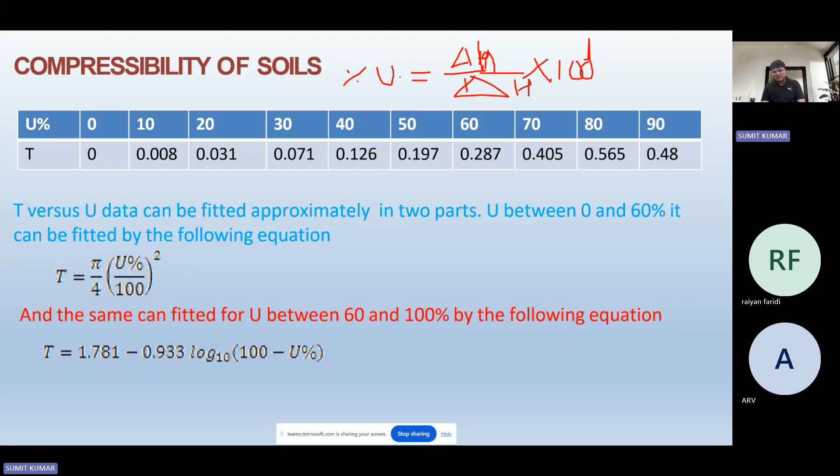But again, some things you need to remember: what is the value of T when percentage U is 60%, because you need not calculate every time whether the percentage is greater than 60% or less than 60%. So T value is 0.287 when you calculate pi by 4 into percentage U of 60, that is 60 upon 100 squared. So you get the value as 0.287. In this manner you have calculated the value of T.

Subsequently, when the percentage U value is greater than 60, you use the correlation mentioned below, and you could calculate the value of T for those cases. I will suggest that once the lecture is over, you try this by yourself using calculators, and you will get the correct picture of what we are discussing.

Now, when we are talking about the compressibility, it is mentioned that if the soil above and below the consolidating layer are pervious, the water under pressure in the layer will travel either upward or downward. This case is known as two-way drainage, and the length of drainage path, that is the maximum length the water particle needs to travel for dissipating pore pressure from the consolidation layer, equals thickness of layer upon 2.

Suppose over here you can see the figure, three layers are there, in which the second layer, suppose this layer is clay, is present between two layers, in which the upper layer is pervious, meaning permeable, and the lower one is impermeable. So if it's a pervious layer, it might be sand, but if it's an impermeable layer, it is clay or silt.

So over here, when the load is applied in the downward direction, the settlement takes place due to expulsion of pore water pressure, or the void present gets removed. But we have read in consolidation as well that... give a minute.

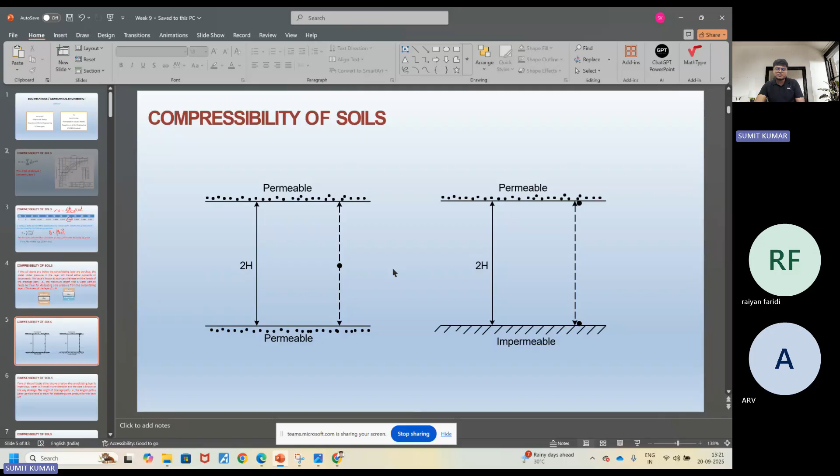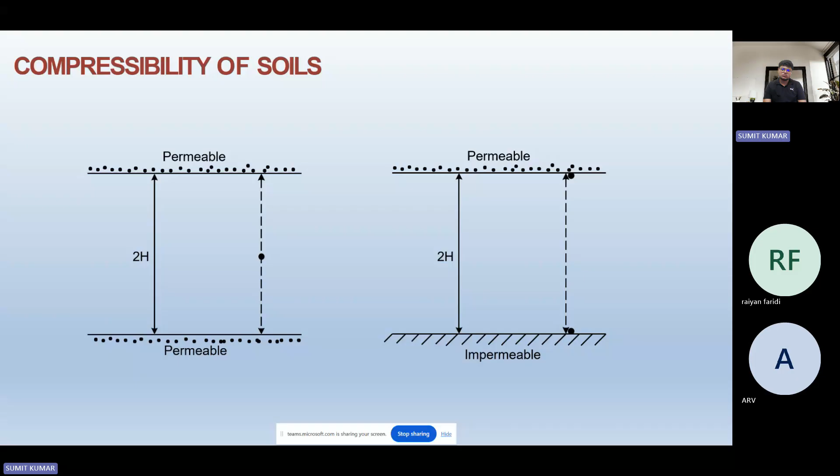Now, oh sorry, I don't need to draw that, it is already in the next slide. Over here you see that in the first case, the permeable layer is present in the upward as well as downward direction. Hence, when the load is applied, the expulsion of water present in the clay layer takes place in both directions. Hence, the 2h becomes h, and in the same way, in the second layer, if the impermeable layer is present in one direction, it remains h only, not h by 2, or in that case 2h, or in that case h, right.

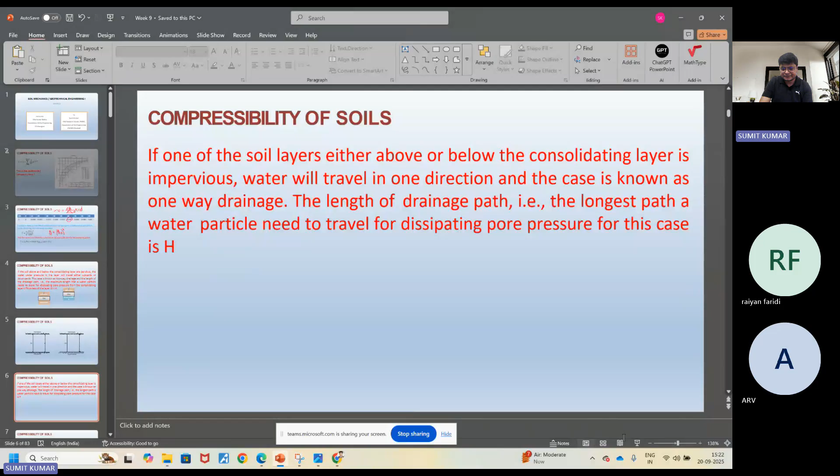Now you see over here, if one of the soil layers either above or below the consolidating layer is impervious, water will travel in one direction, and this case is known as one-way drainage, while the length of drainage path remains the same, that is the longest path as the water particle needs to travel for dissipating pore water pressure.

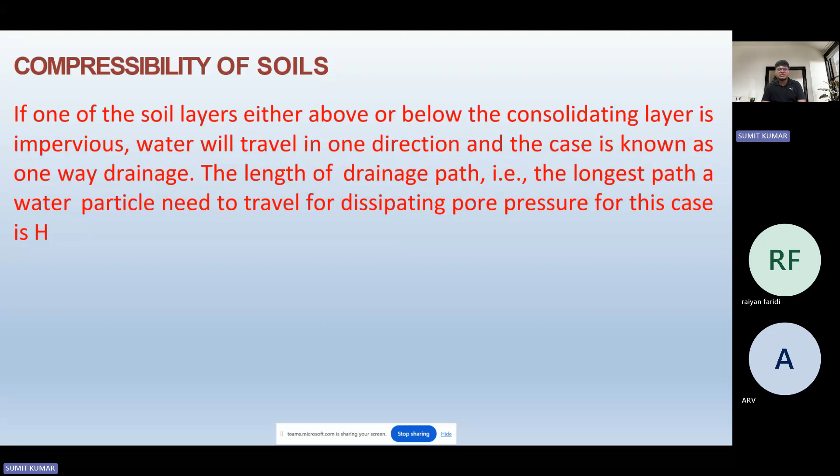But in the other way, if the pervious layer, permeable layer, is present both in the upward and downward direction, in that case the water dissipation takes place from both directions. However, if for a particular pressure increment applied during the consolidation test, the compression of the test sample is plotted against the square root of time, the results shown in figure in the next slide.

But what I want to show, one more important thing is, before going ahead, I want to mention that if you have observed, for the sand layer, settlement takes place in a very small interval of time. Whatever settlement is going to take place happens in a very small time interval and is already achieved. Suppose you are constructing some multi-story building, and over there the soil is sand type soil.

So the settlement at those locations takes place during the construction of that building only. But why? If over there clay soil is present, that settlement takes place over years, not even in 2 years, 5 years, 10 years. Maybe it takes 50 years, 100 years, or many more, because in clay small pores are there, and that settles over the period of time.

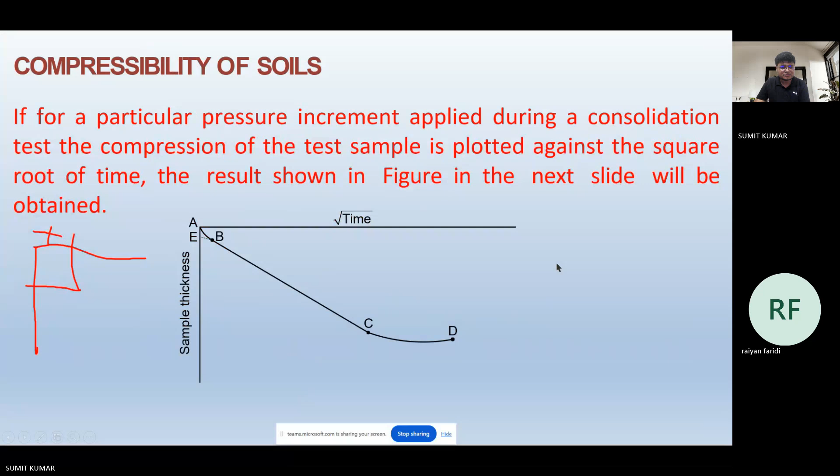So we are talking about the compressibility of soil. The curve is seen to consist of three distinct parts: AB, BC, and CD. The AB, if you look at this graph, we are discussing about this only, in which root time versus the sample thickness has been plotted. In this, if you have seen the AB point, which is the initial section, AB, then BC, and then CD.

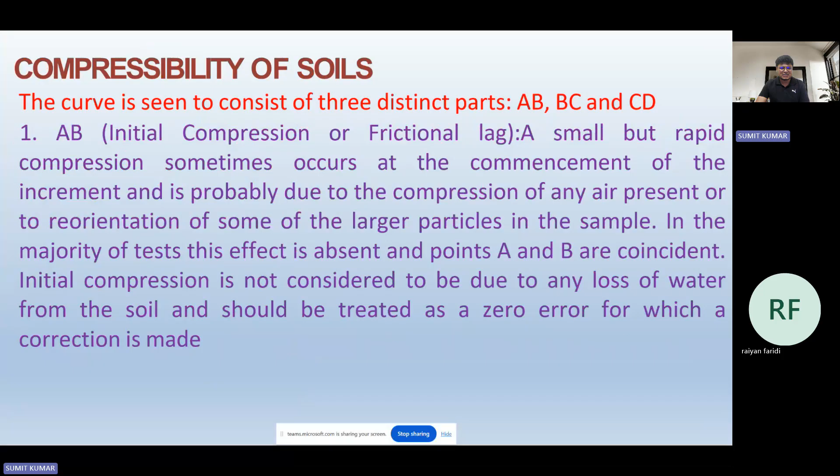So initial compression, or the frictional lag, a small but rapid compression sometimes occurs at the commencement of the increment, and is probably due to the compression of any air present or the reorientation of some of the larger particles in the sample. In the majority of tests, this effect is absent and points A and B are coincident. Okay, so I am not very keen to discuss these things. I will move to questions later. If we need it, we will discuss this.

The basic thing you have already understood. We move to problems. Once the problems are done, we come over there.

Starting with the first problem, in which it is asked about Terzaghi's one-dimensional consolidation theory: assuming E versus P relationship linear, or E versus log P relationship linear, or E versus log P by P naught relationship linear. We haven't discussed this today, but if you have attended those lectures taught by sir, you could be able to answer.

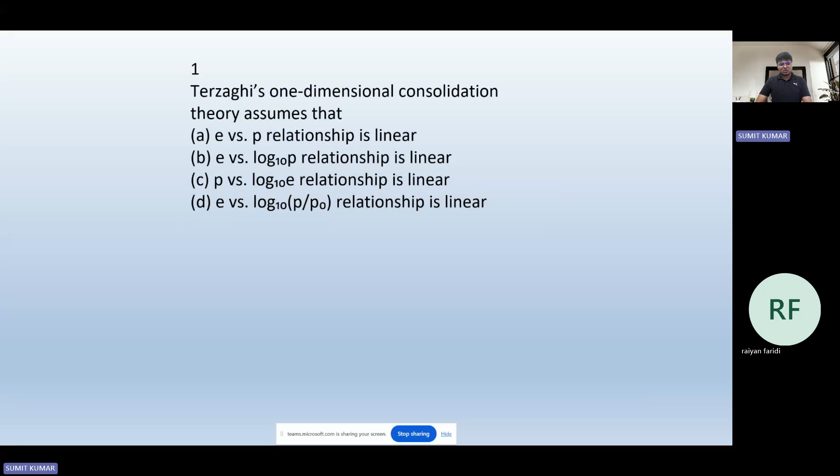Option A, that is E versus P relationship of Terzaghi's one-dimensional consolidation theory, because it assumes coefficient of compressibility as constant, hence E versus P relationship is linear.

Now the second question says the coefficient of consolidation is used for: establishing the duration of primary consolidation; estimating the amount of settlement for the load increment; determining the depth to which the soil is stressed when the load is applied on the surface of the soil deposit; or determining the pre-consolidation pressure of the soil deposit known to be over-consolidated.

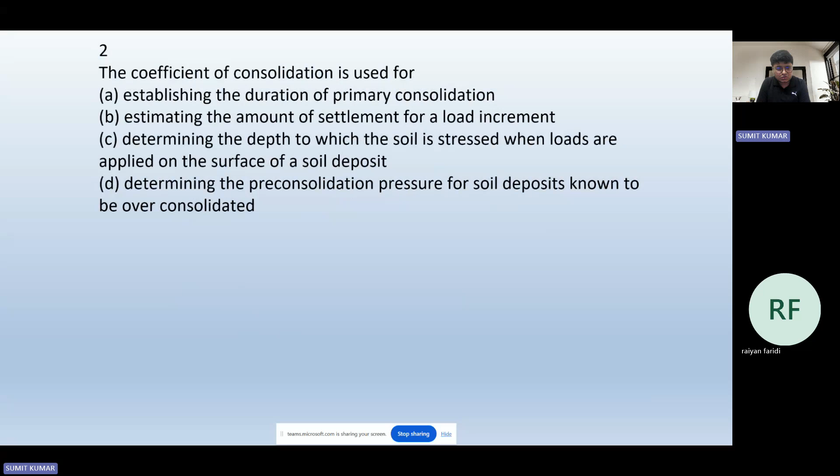If you have read this, the option... TV equal to CV into T by H square. If you remember, we have shown you this correlation.

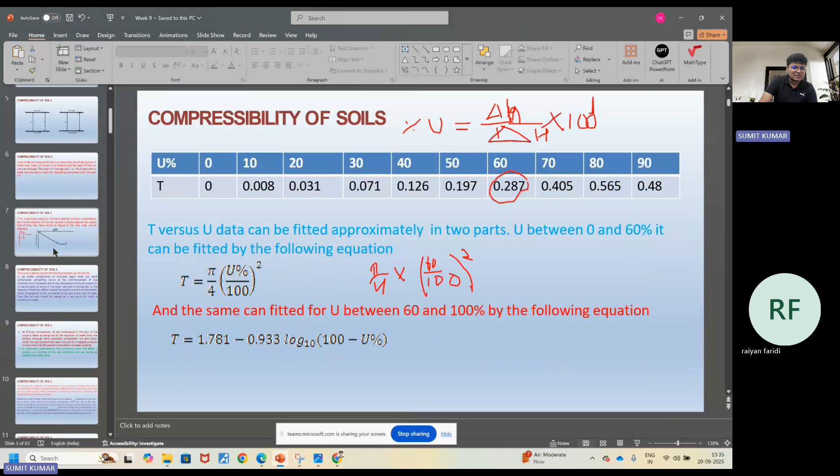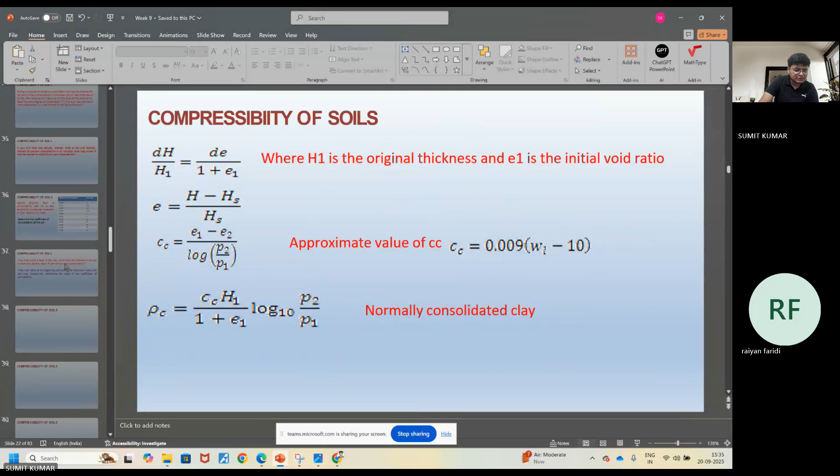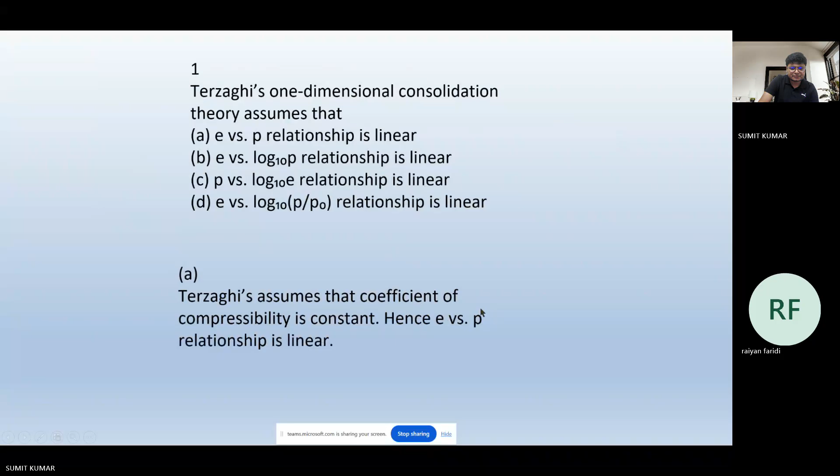As TV equal to pi over 4 into percentage U by 100 square. Subsequently, this TV is related as TV equal to CV into T by H square, where H is the thickness.

So in this it is asked that the coefficient of consolidation is used to establish the duration of primary consolidation, estimating the amount of settlement of the load increment, determining the depth to which the soil is stressed when the load is applied on the surface of the soil deposit, or determining the pre-consolidation pressure for a soil deposit known to be over-consolidated. Option A, establishing the duration of primary consolidation, is the correct answer.

As has been written, and as you understood as well, that TV equal to CV into T by H square, where TV is also equal to, let me write.

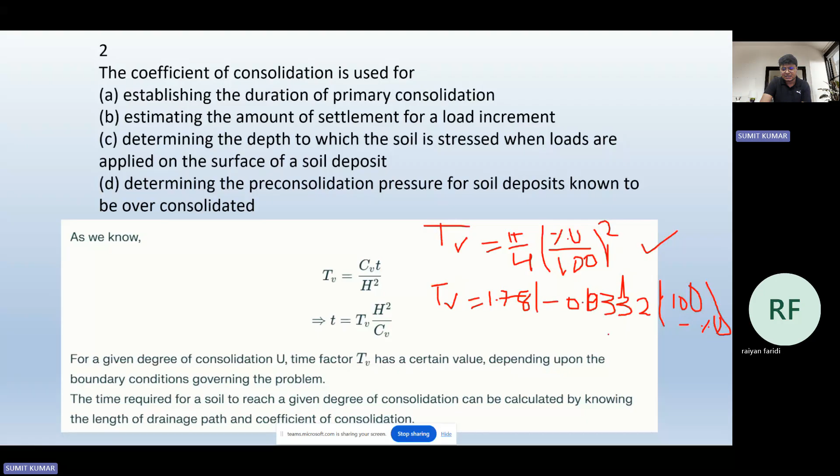These two correlations are used. This relation is used when percentage U is less than 60%, and this relation is used when percentage U is greater than 60%, that is 60 to 100%, more than 60 but equal to or less than 100. And that is for percentage U less than 60%, at which the value is 0.287, or 283, as I could recall—I don't remember exactly. Okay, so this question is clear.

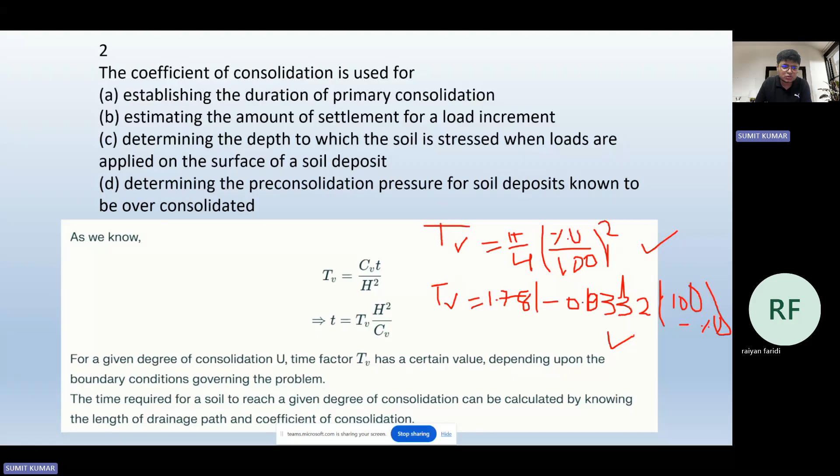Now the next true-or-false question, in which it is asked that 50% of the consolidation at a site subjected to a stress level of 200 kPa occurred in 2 months. If the site has been loaded to 400 kPa, 50% of the consolidation would occur in 4 months. This is clearly a false statement. So since the option is not mentioned, false is the correct answer for this.

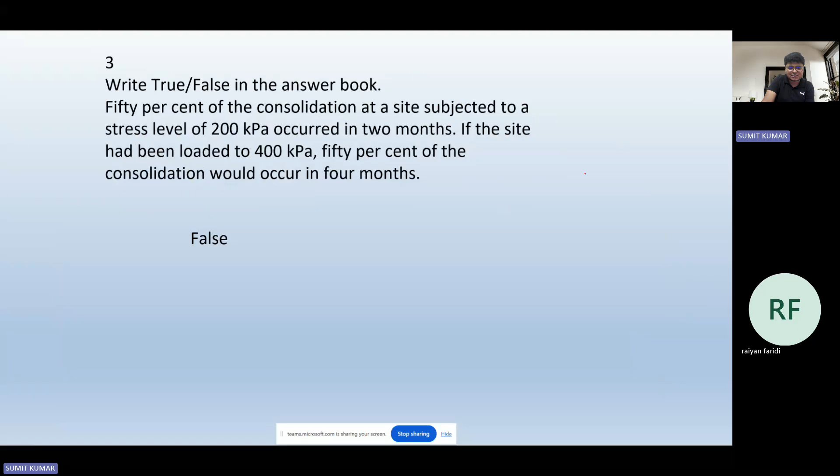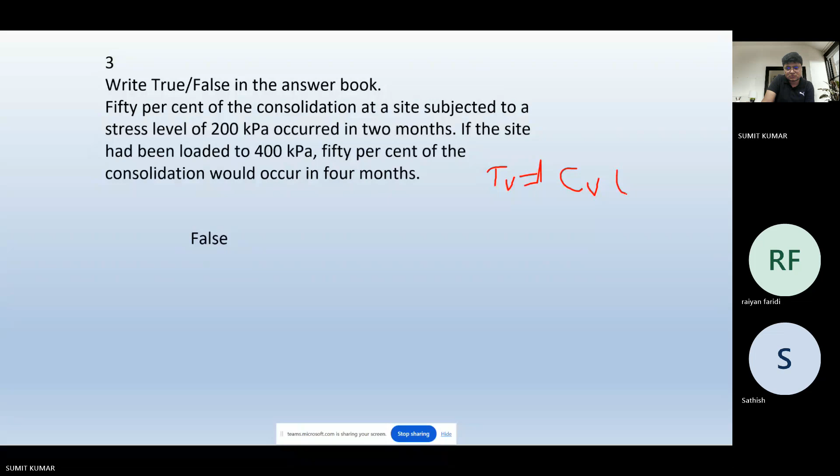Why? Let me write the explanation as well. If 50% of the consolidation takes place, this means what? 0.196.

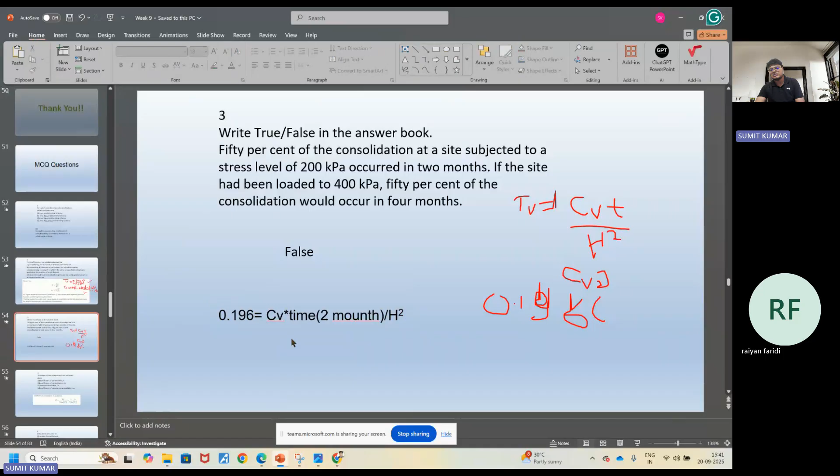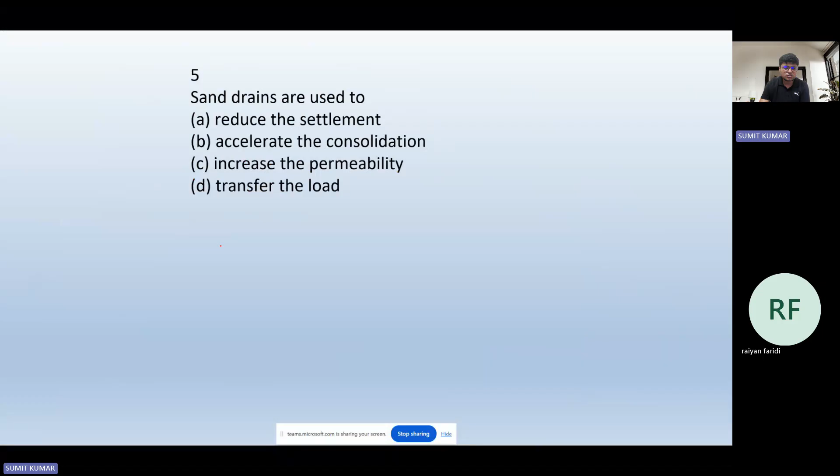So over here, the options are clear. The correct answer for this is option B, accelerate the consolidation. How? Let me draw, let me write. C for clay, sand is there, sand is there, and in this case the consolidation settlement takes place quicker because the water will dissipate in both directions. So accelerate the consolidation settlement is the correct answer.

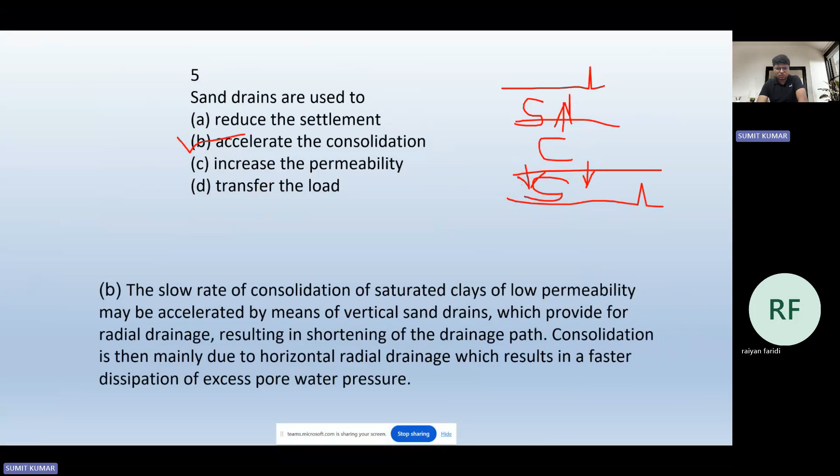Now the next question, over here the stress-strain behavior of soil. You can see curve 1 and curve 2. Curve 1 shows a sharp turn after reaching a specific axial strain, but in curve 2 a progressive behavior is given. So curve 1... first of all, find the normally consolidated soil.

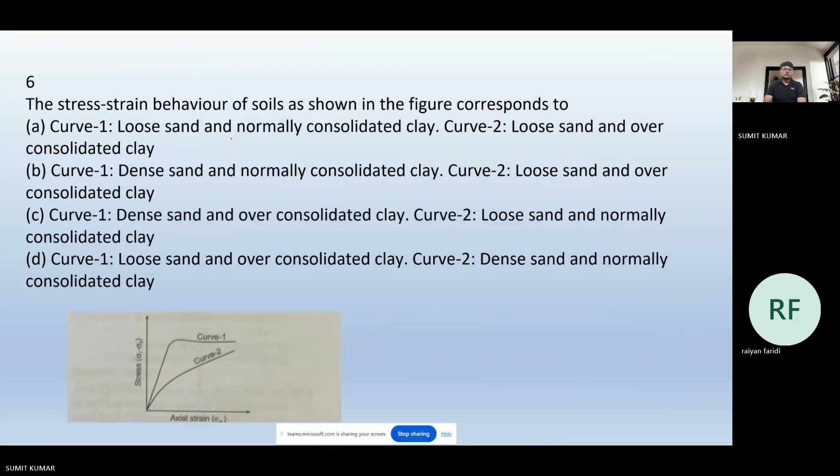So options C and D could be the potential answer. Now, the loose sand and normally consolidated - option C is correct because curve 2 represents the loose sand and normally consolidated clay, while curve 1 represents the dense sand. That's why once it reaches the specific strain value at the desired shear stress value, it will show a sharp turn in the horizontal direction. So option C is the correct answer for this given problem.

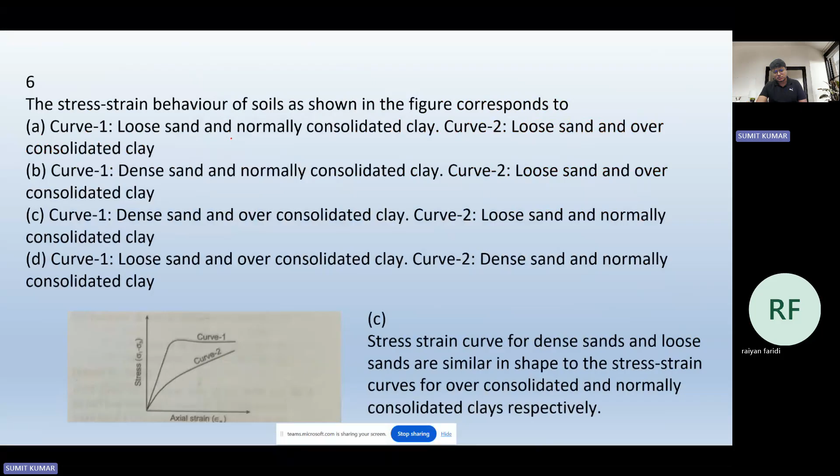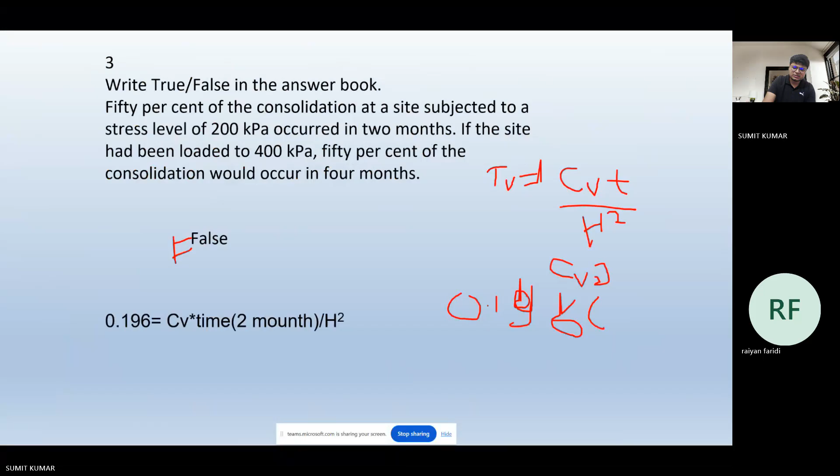Okay, so you know Tv equal to Cv into T by H square. Use this correlation to solve it.

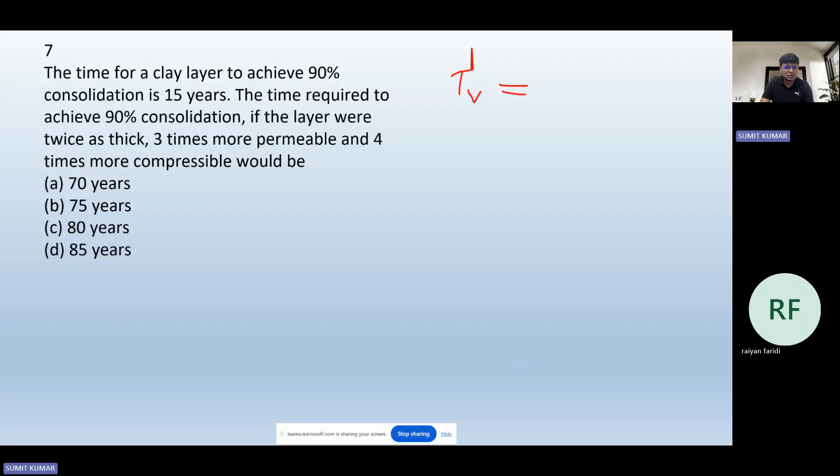Okay, so we have this question in which it has been asked that the time for the clay layer to achieve 90% consolidation takes 15 years. The time required to achieve 90% consolidation if the layer were twice as thick, 3 times more permeable, and 4 times more compressible would be... let me clear something here.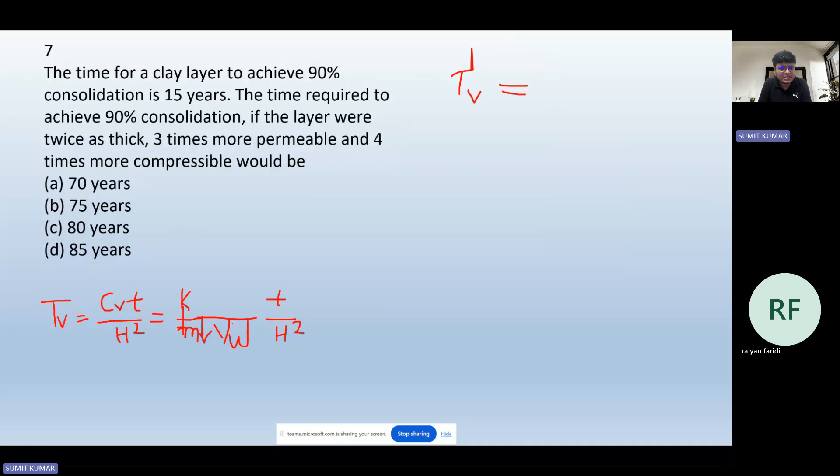One important thing: Cv equal to K by mv gamma w. This is another correlation, where permeability K and mv equal to Av by 1 plus e naught. So permeability is there and for compressible, mv is there - mv is nothing but Av by 1 plus e naught. Through this relation we have calculated; I already have the solution, so let's see.

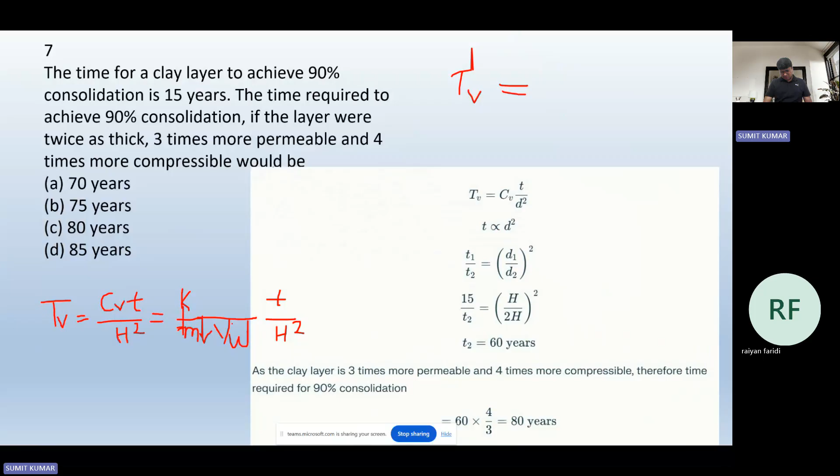Tv equal to Cv T by d square, T is proportional to d square. T1 by T2 equal to D1 by D2 square. So 15 by T2 equal to H by 2H, so T2 equal to 60.

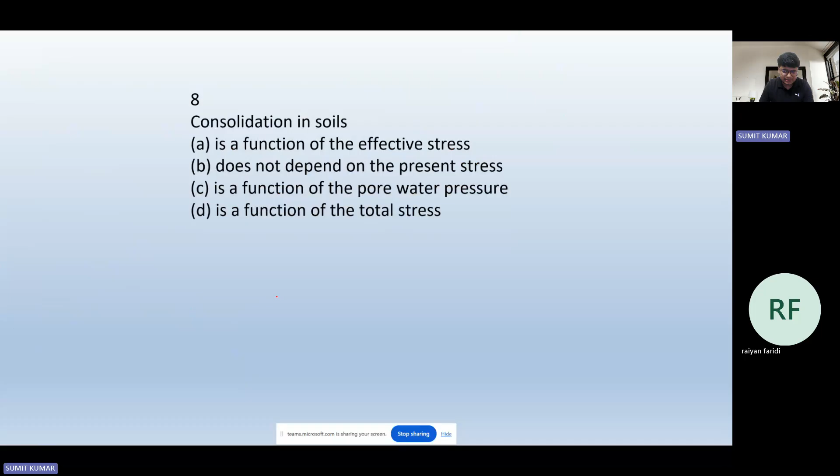Next question: consolidation in soil is a function of effective stress, does not depend on present stress, is a function of pore water pressure, or is a function of total stress. So it is a function of effective stress - option A is the correct answer.

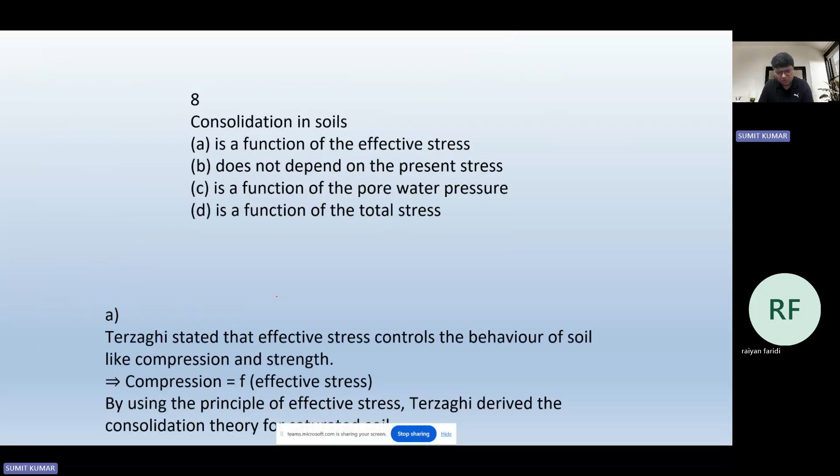And explanation is also mentioned here, but I will not read this. Next, identify the two false statements from the four statements. The first statement says the consolidation of soil...

The first statement says the consolidation of soil happens due to change in total stress. Second says when standard penetration tests are performed in fine sand below the water table, the dilation correction is applied after the overburden correction is applied. Third says over-consolidated clay will have predominantly cohesive strength as compared to frictional strength. And the final statement says compaction of soil is due to expulsion of water.

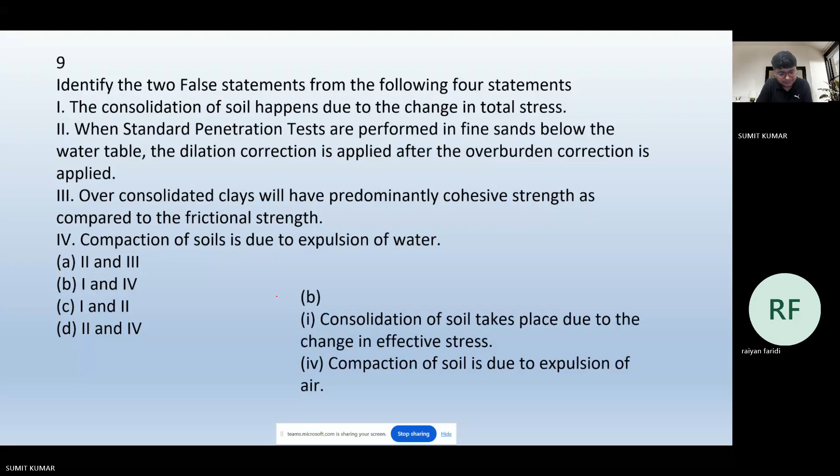Now, the next question is: the time for a clay layer to achieve 85% consolidation in 10 years - if the layer was half as thick, 10 times more permeable, and 4 times more compressible, then the time required to achieve the same would be. So this is a similar question to what we solved earlier.

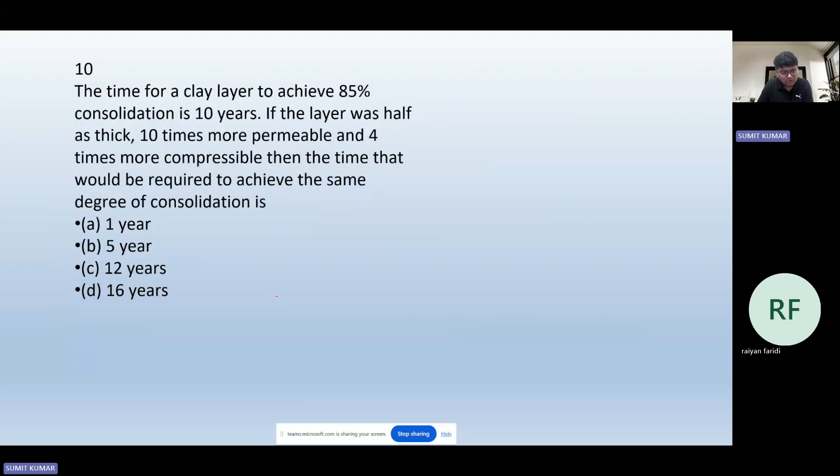I am again using the same concept, that is Tv equal to Cv into T by D square, Cv equal to K by mv gamma w, and mv equal to Av by 1 plus e naught. The solution is like this: K equal to Cv into mv gamma w, and we know Tv equal to Cv into T by H square. By implementing the relation K equal to Cv into mv gamma w, Cv becomes K by mv gamma w, and when we relate it with time, it becomes H1 square into Tv by K1 into mv gamma w. So for T1 and T2, we know the time T1 as 10 years, so we need to calculate T2.

When we do the calculation by resolving all these, it comes out to be 1 year.

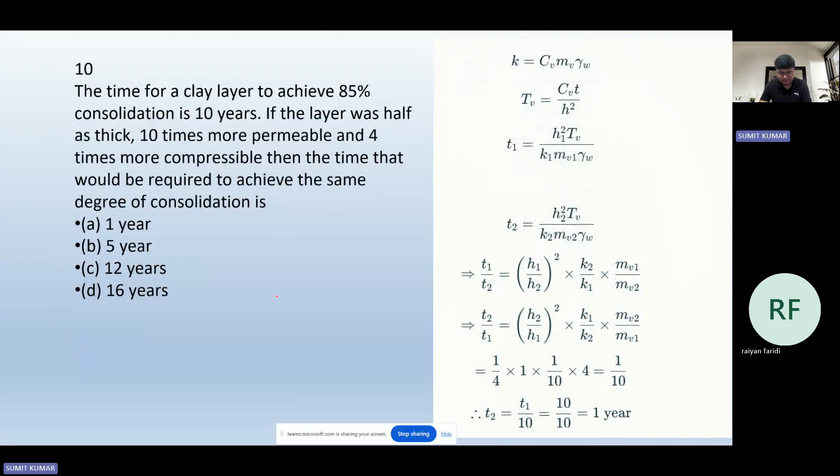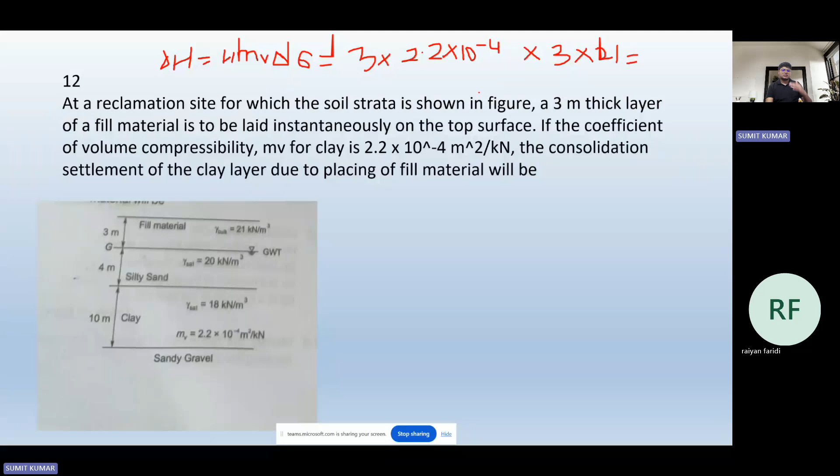And over here, the solution is already mentioned, which you see. First of all, we have calculated delta sigma like this, which comes to 63. Now we multiply that with H naught and MV. The value comes out to 0.1386 meter.

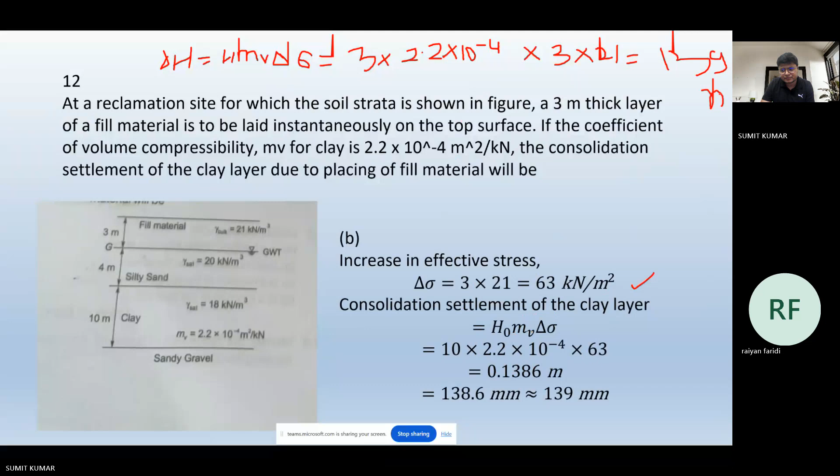Now next question is that if the pressure acting on a footing is 40 kPa, the consolidation settlement of the footing will be. The figure is also mentioned over here.

In the solution, first of all, we have calculated the B dash as 1.2 plus 2 into 0.5 into 3, because we have considered a layer at the center at 3 meter, so the dissipation takes place in this manner.

That is two vertical, one horizontal. In that fashion, we have calculated first of all B dash. Subsequently, we calculated the sigma naught, which is 18 into 1 plus 20 minus 9.81 into 3. That comes out to be this much.

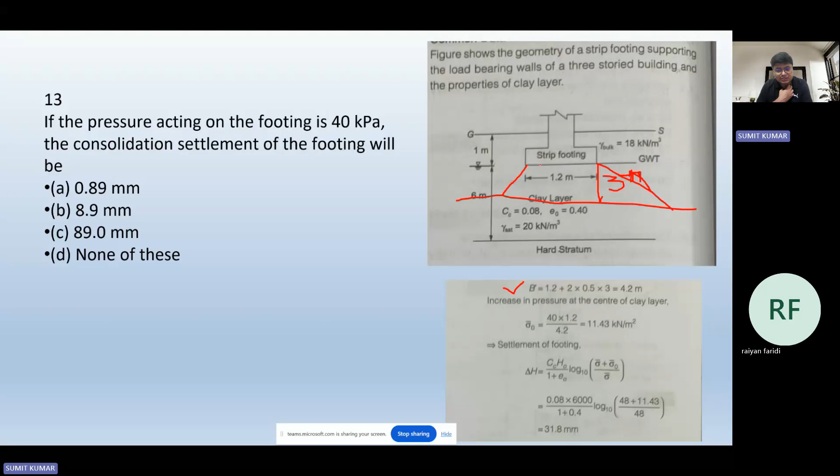Subsequently, when we calculate the settlement, delta H equal to Cc into H naught by 1 plus e naught into log of sigma naught plus delta sigma over sigma naught. When we use those correlations, the value comes out to be 31.8. So over here some mistake is there, I don't know, but the question and solutions didn't match one another.

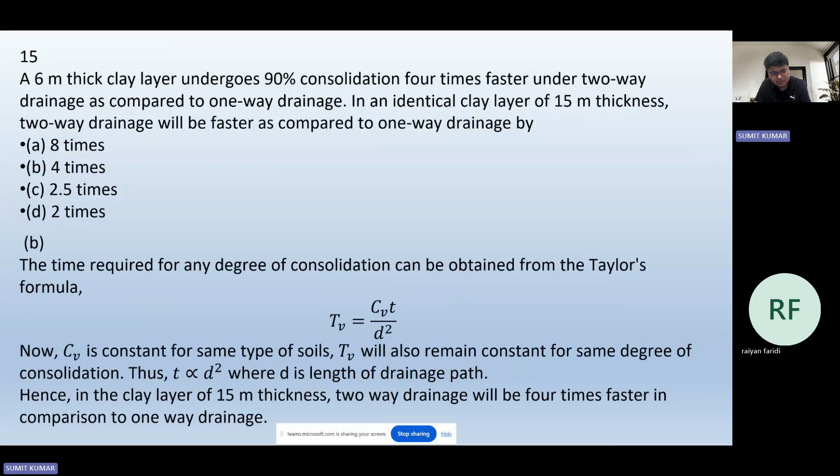So if it is 4 times faster, this time for any degree of consolidation can be obtained by Taylor's formula, Tv equal to Cv t by d squared. If the Cv is constant for the same degree of consolidation, it will require the same proportional duration, that is option B, that is 4 times.

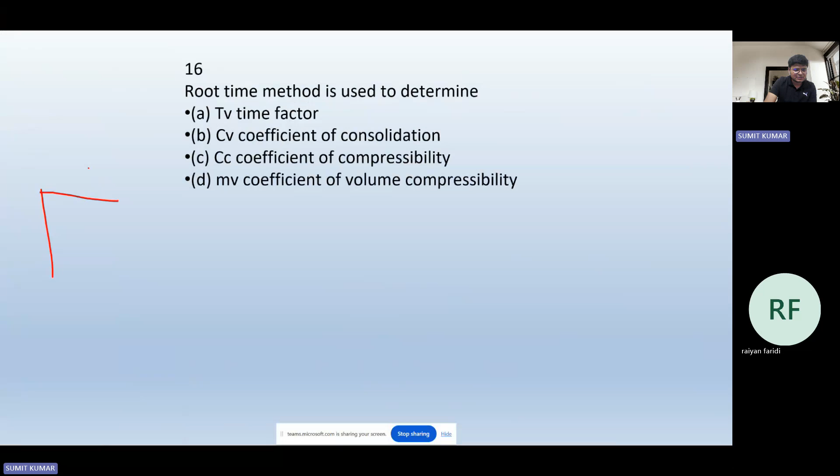Next question is: root time method is used to determine. If you remember, we have a graph like this, which has root time, and something like this, A, B, C, D.

Those things we have discussed, but I have left it that I will share with you. You will read by yourself because those are theoretical things.

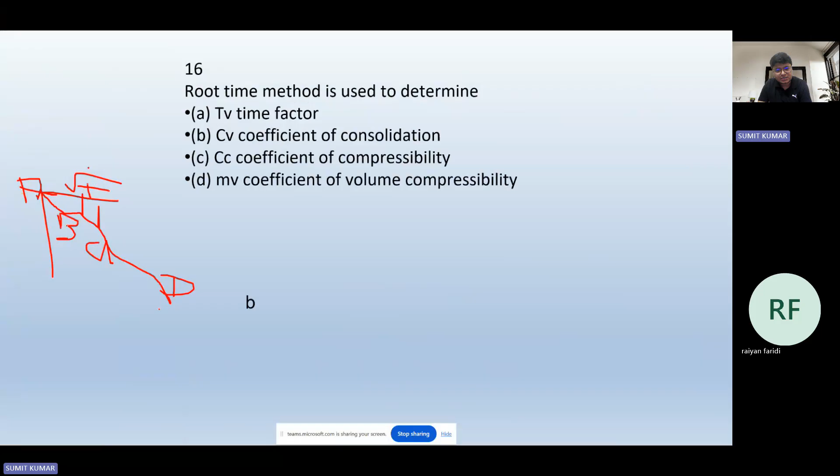Once you read that, you'll know that the root time method is used to determine Cv, that is option B, the coefficient of consolidation.

The next part of the question is linked to the previous one and depends on it. The question mentions that the average effective overburden pressure on the 10-meter thick homogeneous saturated clay layer is 150 kPa. The consolidation test on an undisturbed soil sample from the clay layer showed that the void ratio decreased from 0.6 to 0.5 by increasing the stress intensity from 100 to 300.

So delta sigma is nothing but 200. The initial void ratio of the clay is asked. Everything is given, G is given, void ratio is given, so you need to first calculate the initial void ratio.

So you apply the equation CC equals E1 minus E2 over log sigma2 by sigma1, where sigma2 is given as 300 and sigma1 as 100. When you apply this equation, you know the value of CC, and you can calculate the value of E naught corresponding to sigma naught of 150, which relates to the coefficient of compression.

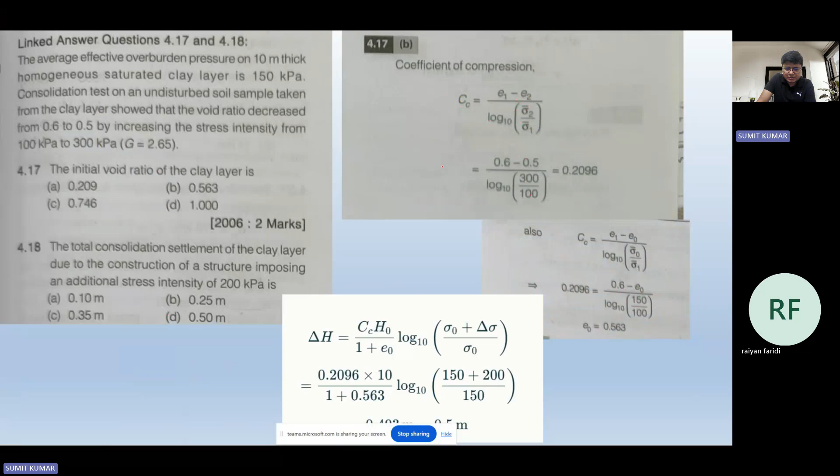The next part of the question asks for the total consolidation settlement of the clay layer due to construction of a structure imposing an additional stress intensity of 200 kPa. So delta H equals Cc into H naught, divided by 1 plus e naught, into log of (sigma naught plus delta sigma) by sigma naught.

So 150 plus 200 becomes sigma naught plus delta sigma, where sigma naught is 150. Calculating this way, the value comes out to be 0.493, which is approximately 0.5.

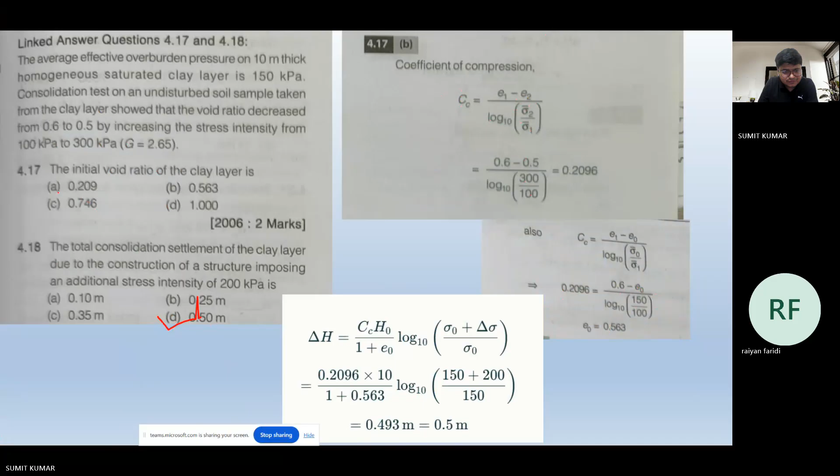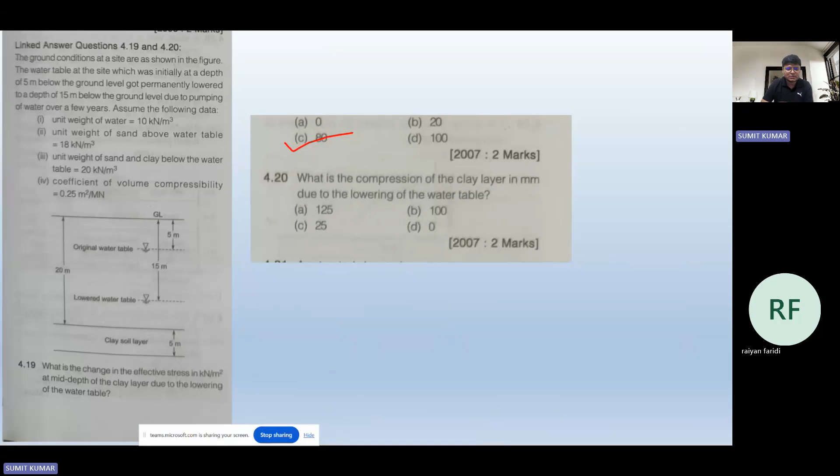Next, option B is the correct answer because the second part of the problem asks for the compression of the clay layer in mm due to lowering of the water table. Due to lowering of the water table, delta sigma changes by 80. So we used that, and another correlation since we don't know the value of the compressibility index. So delta H equals H naught into Mv into delta sigma, which comes out to be 100 mm.

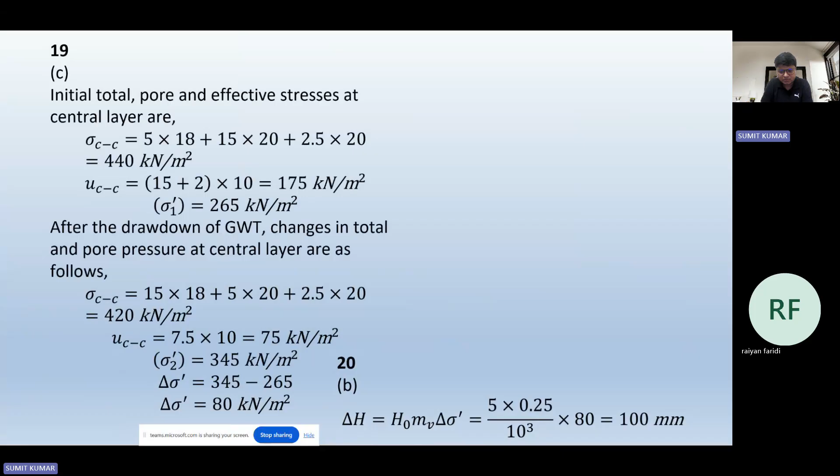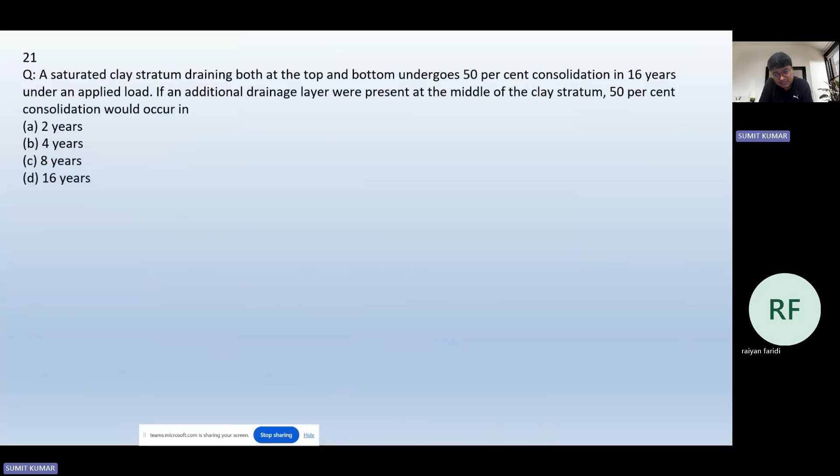Now the next question says a saturated clay stratum, drained both at the top and bottom, under applied load with additional drainage presented, at the middle placed, 50% of the consolidation will take place. If you remember, it takes 1 by 4 the time, that is 16 years, it takes place in 4 years only. But let me show you how the calculation has been made.

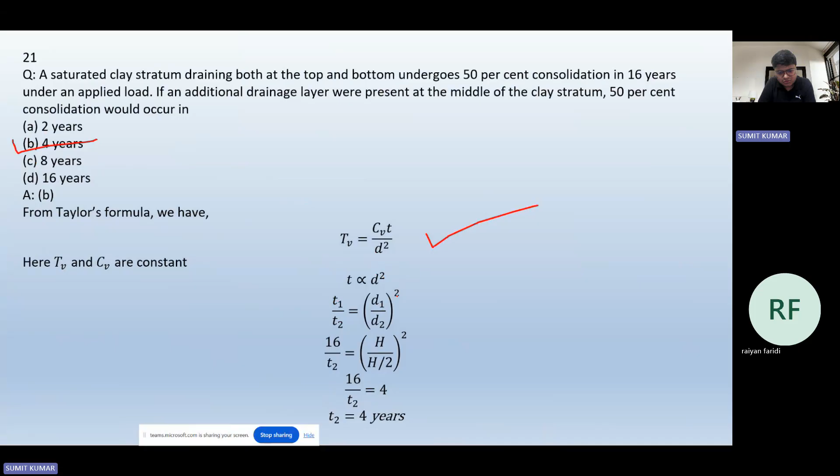So first of all, we use the same correlation Tv equal to Cv into t by d square. Over here, T is proportional to D square, and T1 by T2 equal to D1 by D2 square. We know T1 is 16, we need to calculate T2. And d1 is H and d2 is H by 2. So we have calculated T2 here.

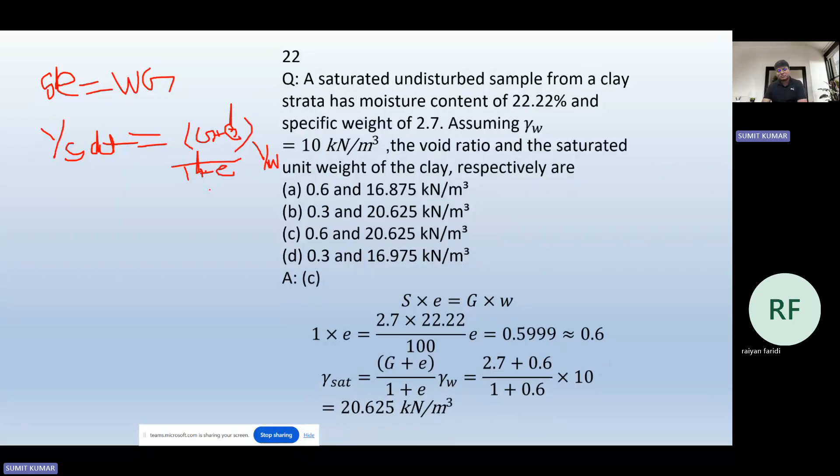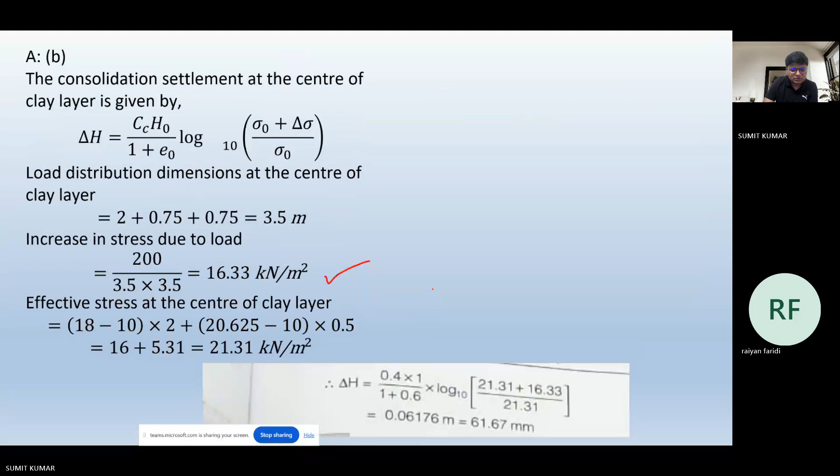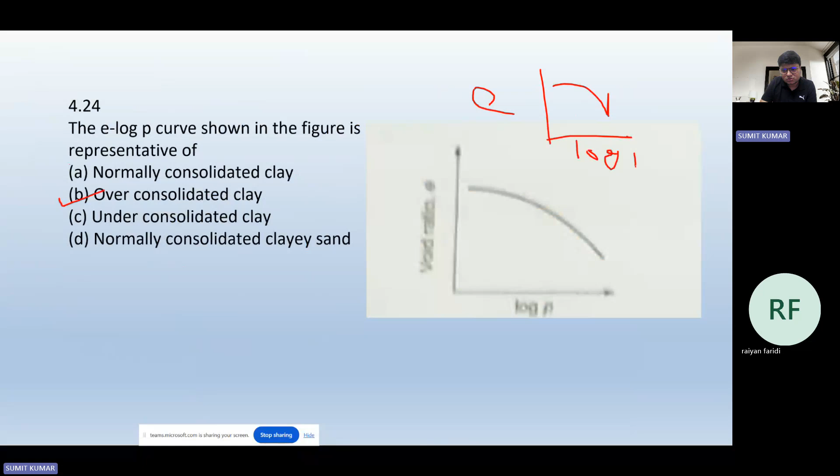Next question: the E versus log P curve shown in the figure is representative of normally consolidated clay, over consolidated clay, under consolidated clay, or normally consolidated clayey sand. If you remember, it is over consolidated, because when the graph moves like this between E and log P, it represents the over-consolidated stage. So that is the correct answer.

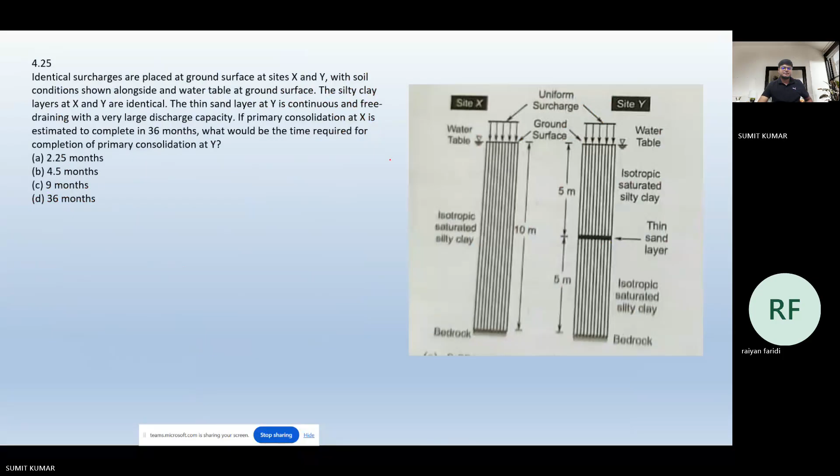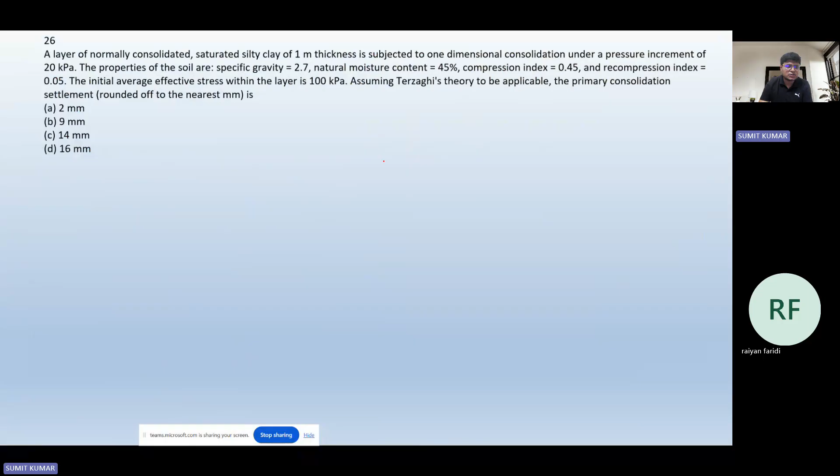Next question: a layer of normally consolidated saturated silty clay of 1 meter thickness is subjected to one dimensional consolidation under a pressure increment of 20 kPa. The properties of soil are: specific gravity 2.7, natural moisture content 45%, compression index 0.45, and the recompression index given. We have to calculate the primary consolidation settlement, which has been calculated here for the difference. Please look at this.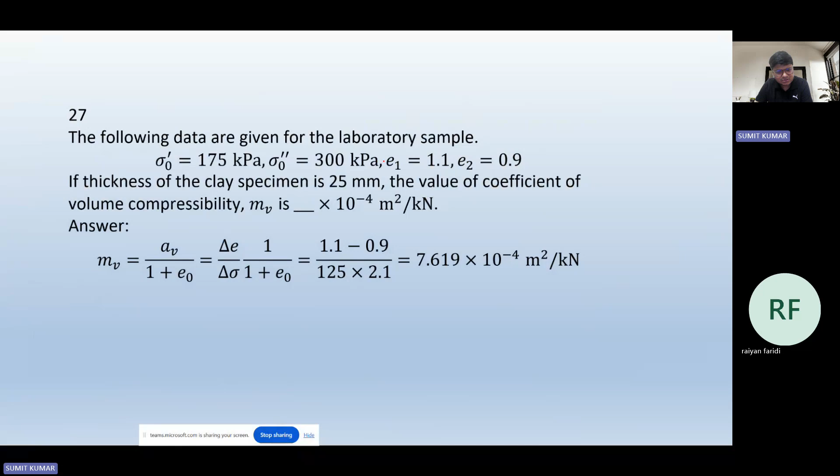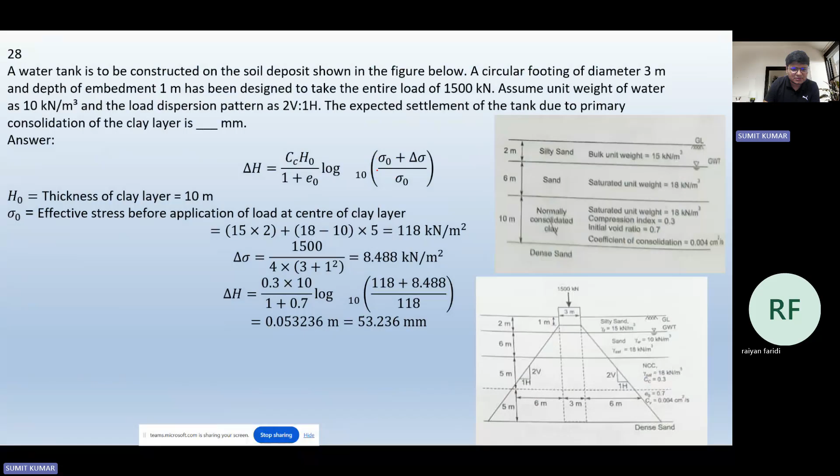Now the next question requires us to calculate the expected settlement, which we have calculated in this fashion. The subsequent questions are also mentioned here along with their solutions.

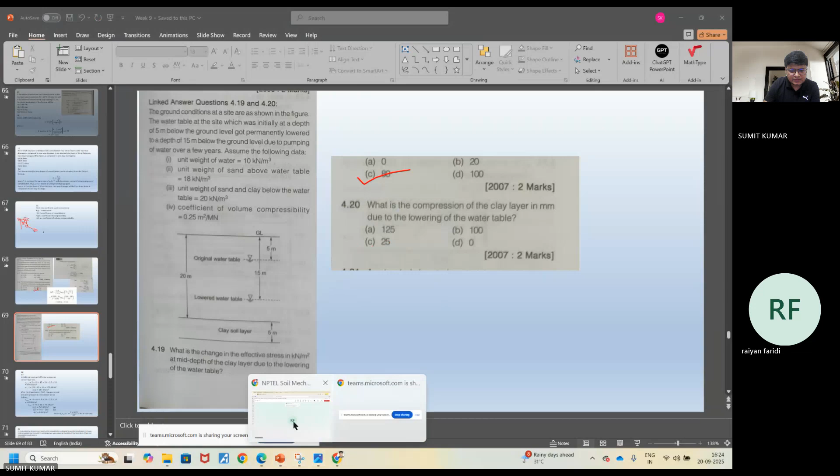Okay, am I audible, Raiyan? Hello. Yes, sir. Yes, sir. Yes, sir. Okay, so I think so.